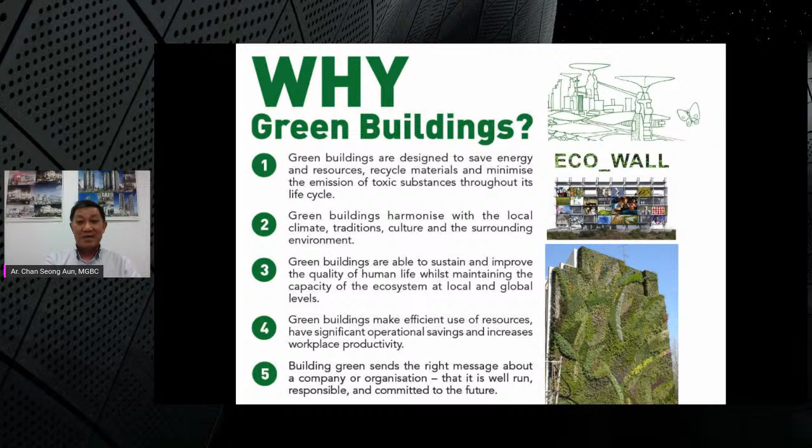Why green buildings? Of course, because they use less energy. They work with the environment they are in. They are more efficient, and they are the future of buildings. And because they are the future buildings, they are also future proof.

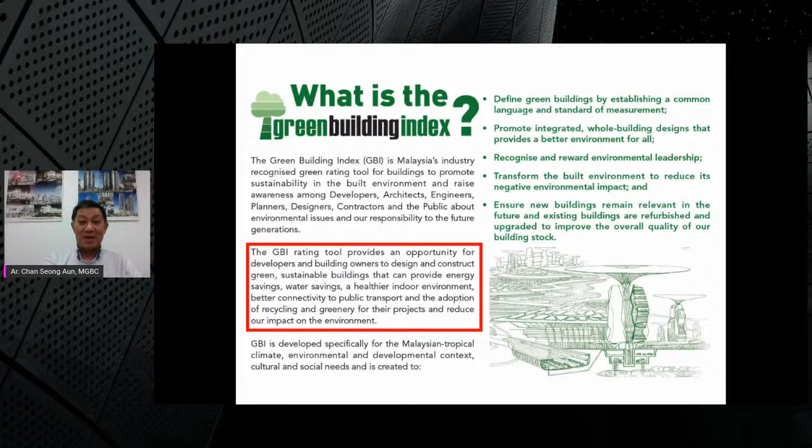The GBI rating tool was introduced in May 2009. Now it's close to 11 years already, and this tool has progressed. I think we have reached close to more than 2 million square feet of GBI rated buildings already.

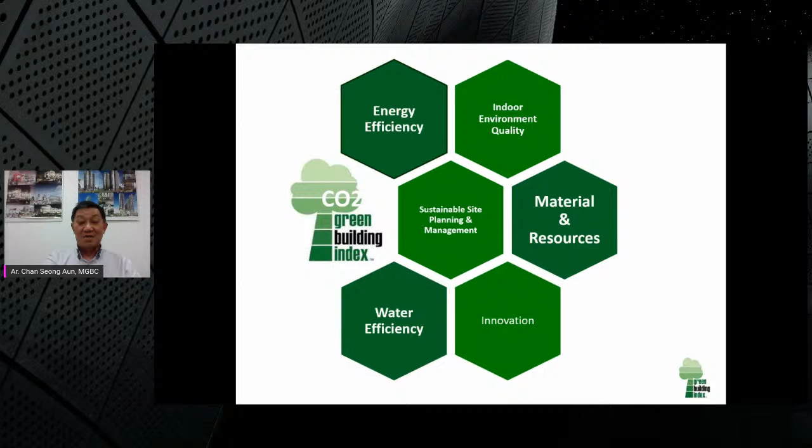This is the area where if you guys have new ideas, we have the ones that accommodate you. When we launched it, we immediately launched two new tools: one non-residential tool and one residential tool.

So we benchmarked the future from 2009 to 2019. On 21st of May 2009, this was the launch of the two tools straight away. Then these are some of the earliest certified buildings.

Then in 2010, one year after that, we immediately launched what is called the existing building rating tool. The reason is because I think this is the building that Architect Halim just talked to you about.

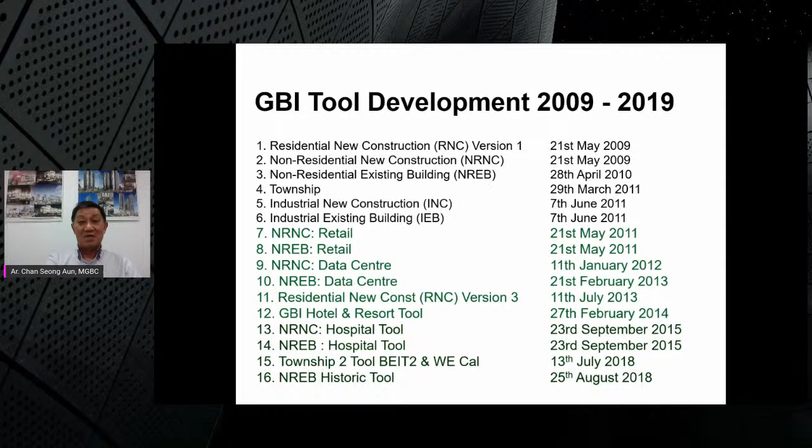In the last 11 years, we have continued to improve our tools, and we have launched close to 16 new tools. You can see in the last 10 years a lot of new tools coming in because there is a request and demand from the public for this type of new tool.

Okay, so now let's talk about upgrading old buildings with new technologies. What do we need? What has been happening in the last 10 years?

The first thing you will notice is new high efficiency glazing that has low shading coefficient but high VLT. What do we mean by that? A lot of the new type of glass coming into the market nowadays, later I'll show you the graph of it, actually lets in more light but blocks out most of the heat.

Then there's the new double glazing technology, they call it ATTOCH. For existing buildings, this is excellent because you don't touch the outside. You can put in a new layer of glass on the inside of the building, making it a double glazing and improving the heat resistance of the building.

Then we have green roofs. A lot of old buildings, as they begin to age, their roof waterproofing also starts to fail. So instead of just putting in a new layer of waterproofing, why not do some gardening on top of the roof? This is happening not only in Malaysia, but in countries like Singapore and a lot of advanced countries.

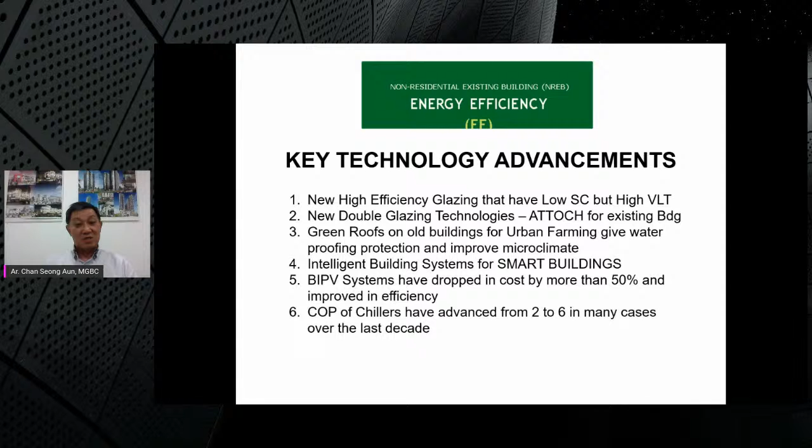And then of course there's the coefficient of performance of chillers. Many of them have advanced from a COP of around 2 to nearly 6 already, so it's almost a 3-time leap. So these are some of the technologies I'll be talking to you about.

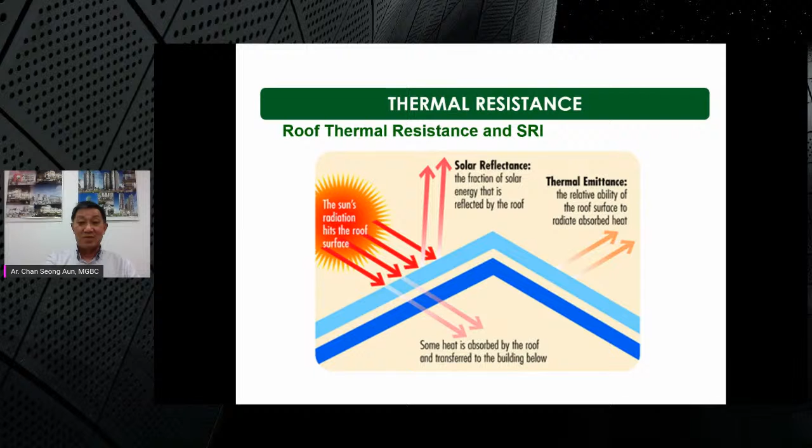Roof resistance, you need to improve the resistance of the roof, especially if it's a low-rise building. Most of the heat comes in from the roof.

This is an example of what I mean by improving it. This is an old mosque whereby JKR actually renovated the building, and they improved the concrete deck of the roof. You can see this - left side is 2015, right side is 2017. This is about a 2-year period for them to renovate, with a difference of 4 degrees centigrade.

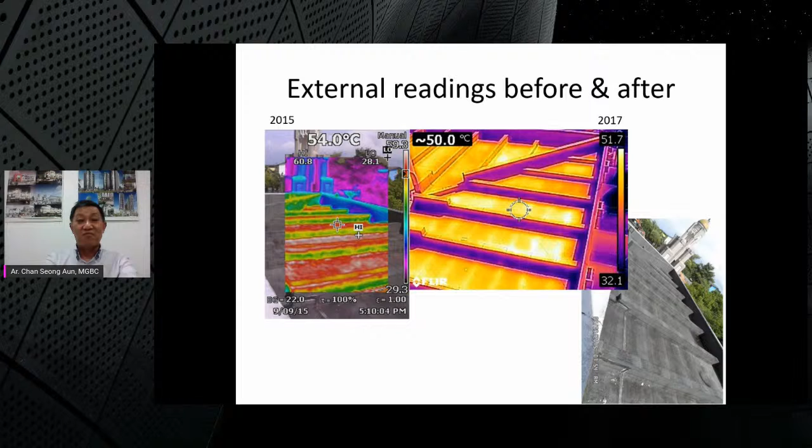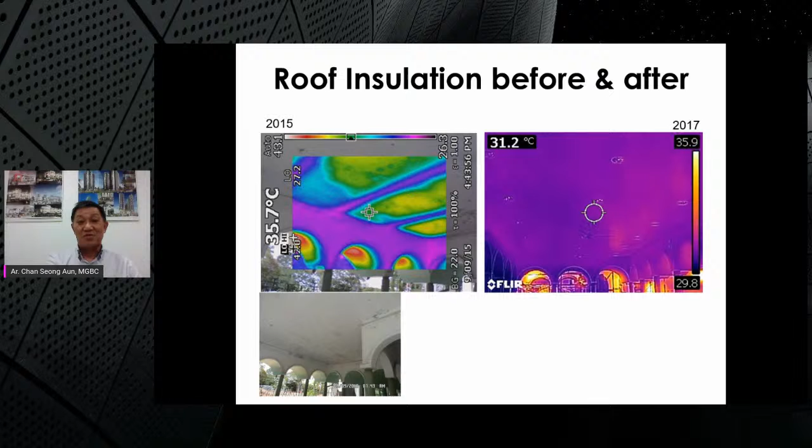This is underneath the roof. In 2015, it used to be 35 degrees centigrade. You can see the new one after renovation dropped down to 31 - a 4-degree difference in temperature of the roof. Imagine in the middle of the afternoon on a Friday, people go for prayer - that 4-degree difference, so you put a fan in, there's a better, even cooler environment.

Now, a lot of people are very skeptical about putting landscaping on top of their roof. This has been proven in Singapore. You can go to the NParks website - they have implemented this technology over the last 10 years in Singapore. You can go to Singapore, practically every roof is landscaped already. The website gives some technical information about how to improve your roof.

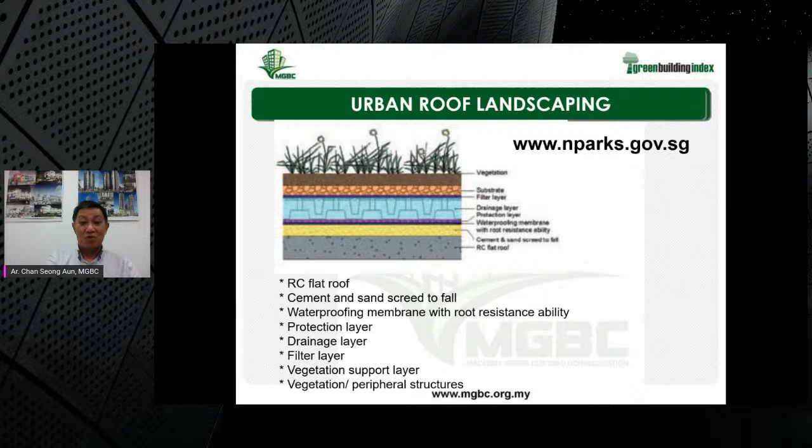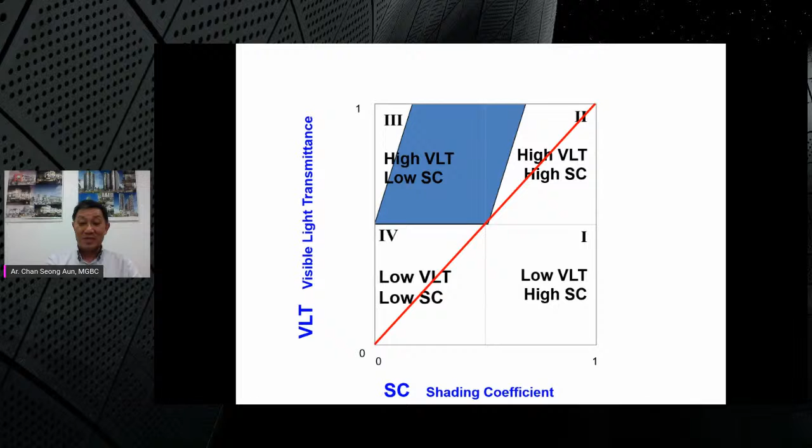The other one is the glass that has been coming in. You can see in the top left-hand corner, high VLT, low SC - this is what most glass technologies are trying to aim towards. Currently the situation is, for example, for tinted laminated glass, the right hand side is where all the glass is, but the new ones, you can see most of them are already in that blue dot on the top left corner.

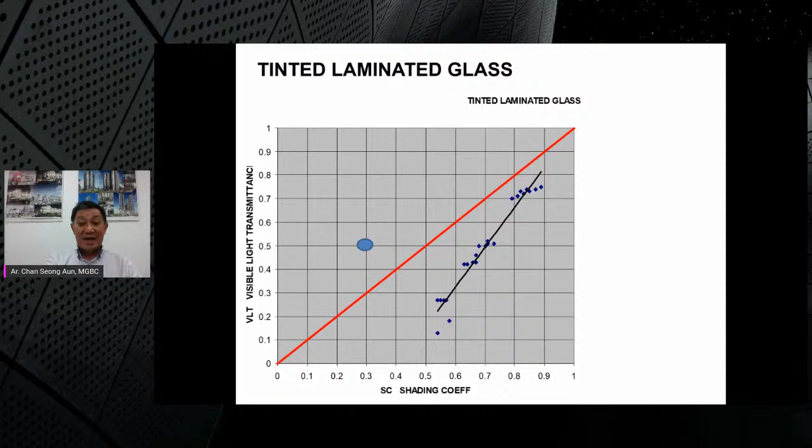And I expect the trend to move even further to the left and to the top. So for a high-rise building, this blocks out the heat from going into the building but allows the daylight to come in. The balance is very good because of this technology.

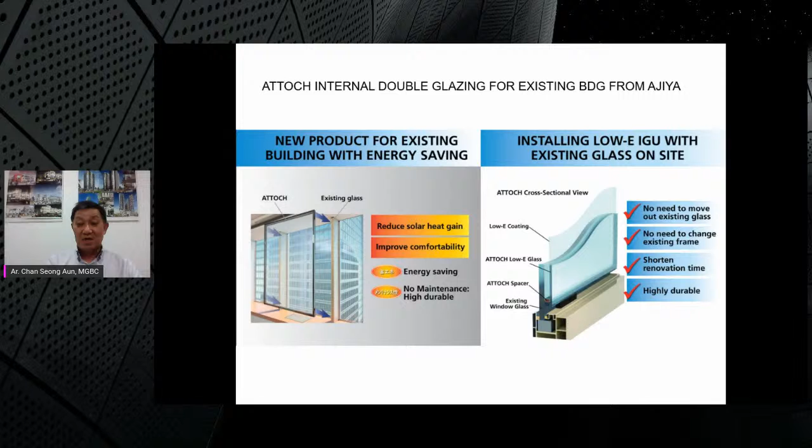Of course, if you're looking at existing buildings, this is the ATTOCH system available from Ajiya. They put the new glass on the inside of the building - this is where it behaves like a new building already, it all becomes new.

Energy use in buildings is typically around 64% for air conditioning in old buildings. If you improve your building and change your aircon systems, you can typically cut down that aircon load by more than 50%. And in the buildings we have been handling, whereby the old building is renovated into a new building, we have been able to achieve this type of targets.

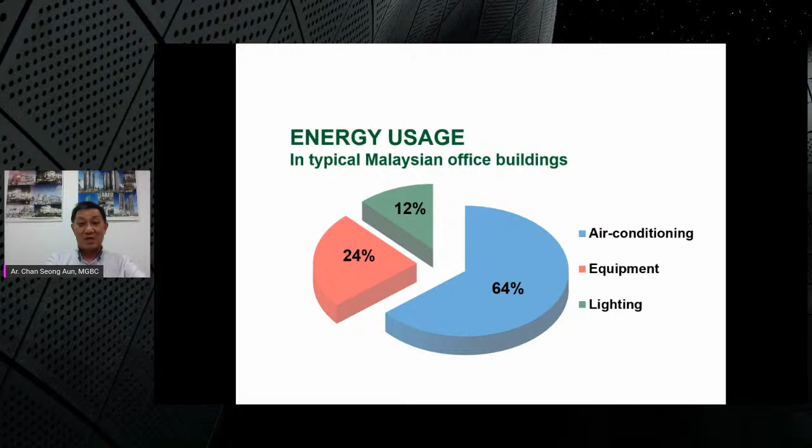Now, indoor environmental quality - what are the other things that you can see? LED lighting technology has improved energy efficiency by 50%. That means nowadays, if you have the old fluorescent tubes, they call it T5, take it out and put in the new LED lights - the energy use is 50% better, using half the energy that normal fluorescent uses, and it increases the operating hours by nearly 4 times.

The other is low VOC paints - these used to cost 20% more, but now cost less than the conventional non-low VOC paints. The other is light sensors and control systems, which are now more reliable and available for less, and the combined fan and motor efficiencies have been improving from 50 to 70% in our aircon indoor environment.

So these are the technologies that, if you are refurbishing your building, can give you that new advancement and improvement in making your building greener.

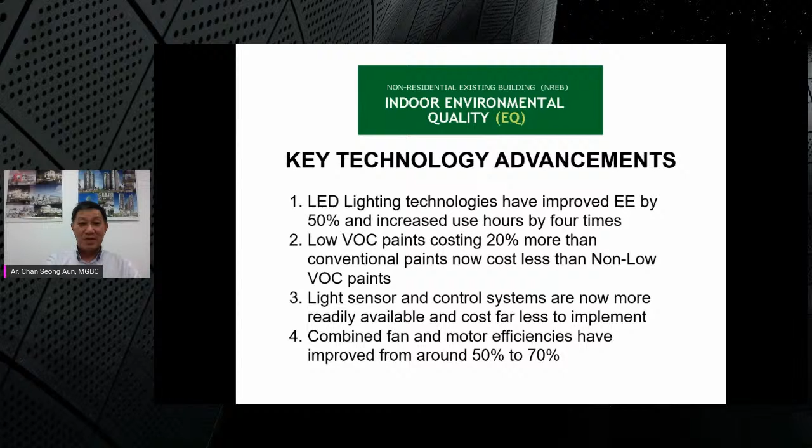Okay, what about sustainable management and site planning? Vertical landscaping systems and green roofs, I already talked about earlier, are now more readily available and accepted by many building owners.

Green and electrical vehicles are set to replace internal combustion engine vehicles. In the next 10 years, by 2030, if you are still driving an ICE vehicle, you are really out of date already.

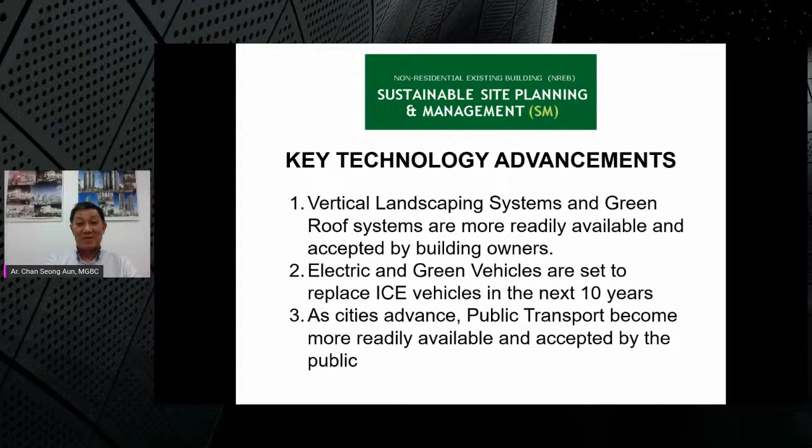As cities begin to advance, public transport becomes more readily available and accepted by the public, so TOD developments then become very important.

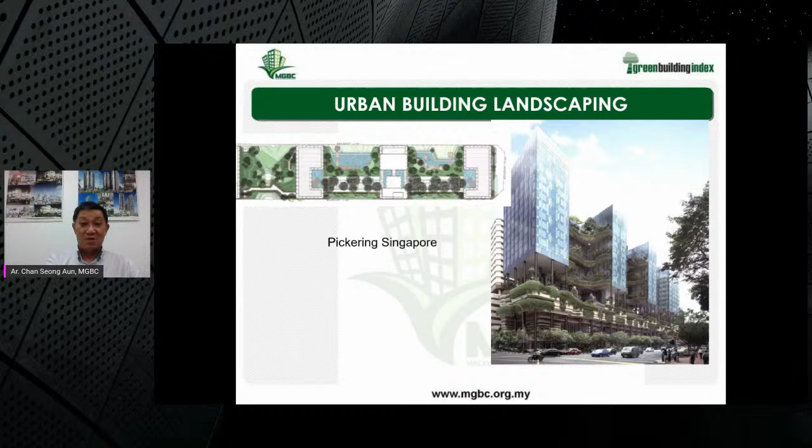Then materials and resources - this is where new construction technologies of off-site buildings have managed to reduce construction waste to less than 2%, approaching zero already. Advancement in the circular economy has also made available many building materials with very high recycled content. I think this is where the new advancements are.

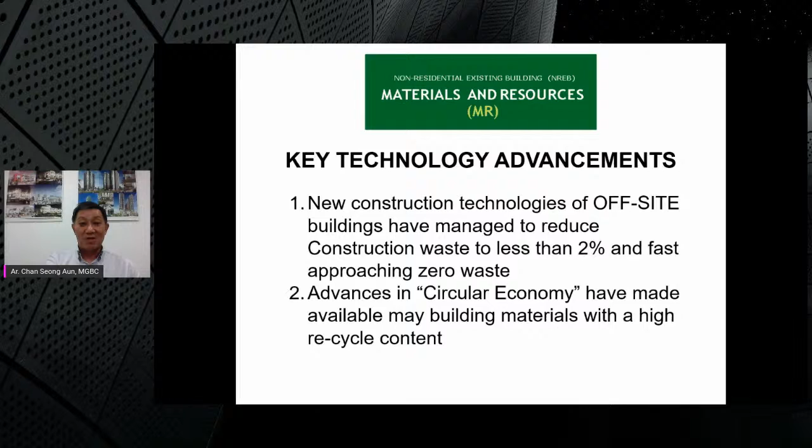If you start to build or order new type of materials, look out for ones which have a high recycled content. Zero waste construction will be for new, not existing buildings. You can see IBS and BIM integration.

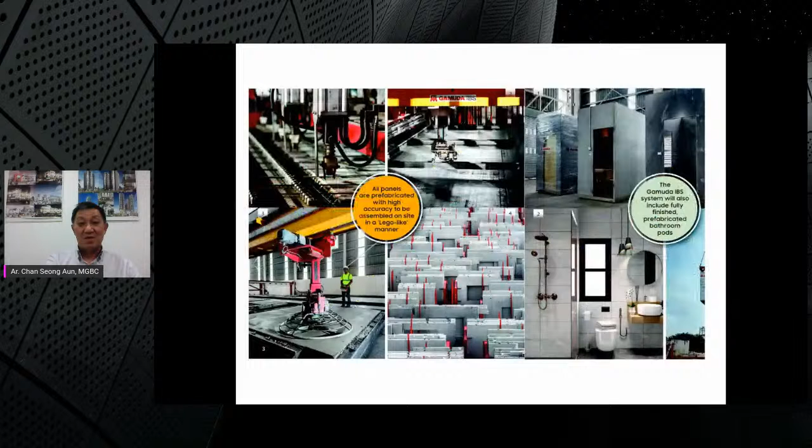I'm not advertising for Gamuda, but they are the ones who have brought in a new system of precast construction. This is the one that they have on their website - it's faster, more efficient, and more sustainable. I think Architect Halim also got one project doing this type of precast system, and I think he reaped the benefit of a greener building from that one.

Other key technology advances, for example in water efficiency, is rainwater harvesting from landscaping, which can reduce your water use for landscaping by more than 50%. That has been the case for the last 10 years we've been looking at green buildings.

And then if you change some of the water fixtures and fittings which are really out of date, you can typically reduce your water use just on the fittings alone by 50%.

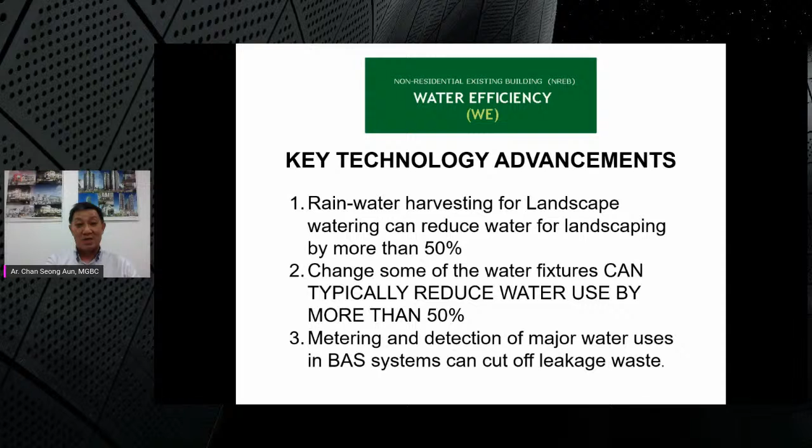Metering and detection of major water uses in the building automation systems can also cut off a lot of leakage and wastage in buildings which are getting older. So these are the key technologies you have in water efficiency.

In innovation, what are the things you can do? The new ones are regenerative lifts - they are already readily available. If your lift is already more than 20 years old, when you renovate your building, might as well put in a regenerative lift. Then there's vertical green walls and green gardens, which I've talked about earlier.

Then there's the solar hot water system. Nowadays the solar hot water systems are so efficient that even in a cloudy sky condition you can actually get hot water. The newer ones have an ROI of less than 2 years - the very good ones are less than 2 years.

Then we have new air filtration systems, which actually block out all the bacteria and viruses - good for our current COVID situation.

Electrochromic glazed facade is the most advanced type of system. This is a bit like glasses you wear - when the sun gets hot, the lens gets darker. So it blocks out more of the glaring light and also blocks out the heat more. These are some of the key technologies available.

Okay, now my time is almost up already. I have a building which I'm doing currently in KL City Center. This one is being renovated based on these key points.

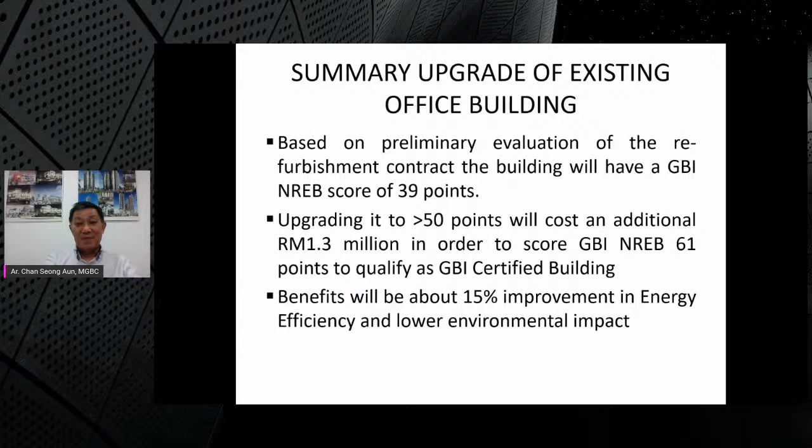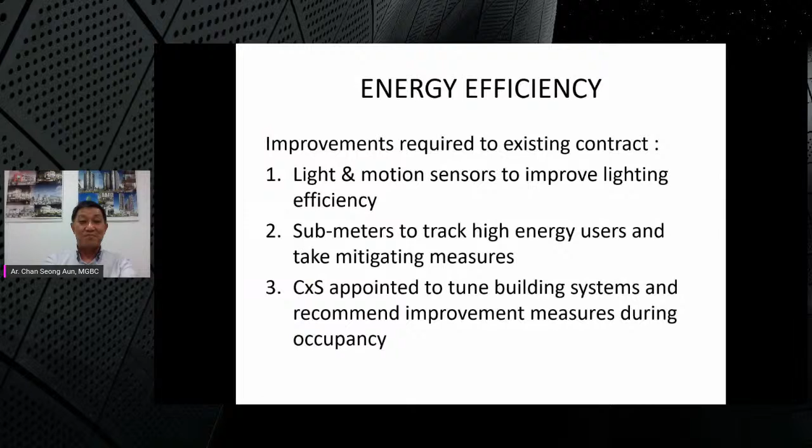I won't go through everything, but this is a quick look at an existing building - I don't want to name it. These are the key things we have been able to achieve, like for example light sensors, sub-meters, and the building's cooling system. We have improved the efficiency by 15% because we are using LED lights.

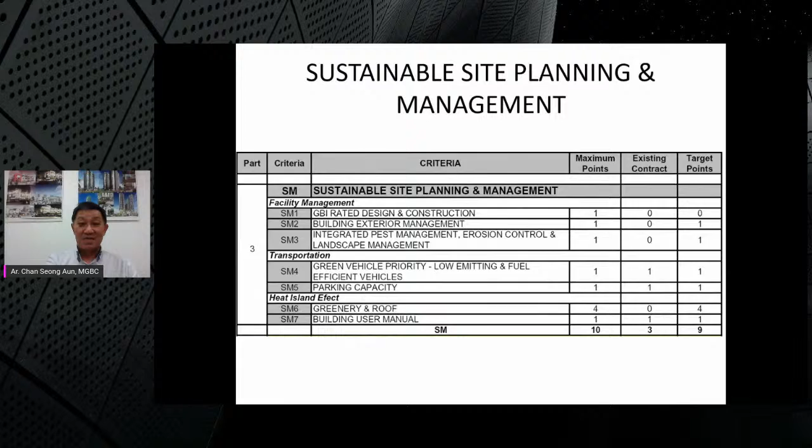We have non-polluting cleaning chemicals, we improve the roof reflectance, and landscape has been increased. The entire RC structure of the building is retained - we improve it because we don't waste the concrete that has taken so many years to build.

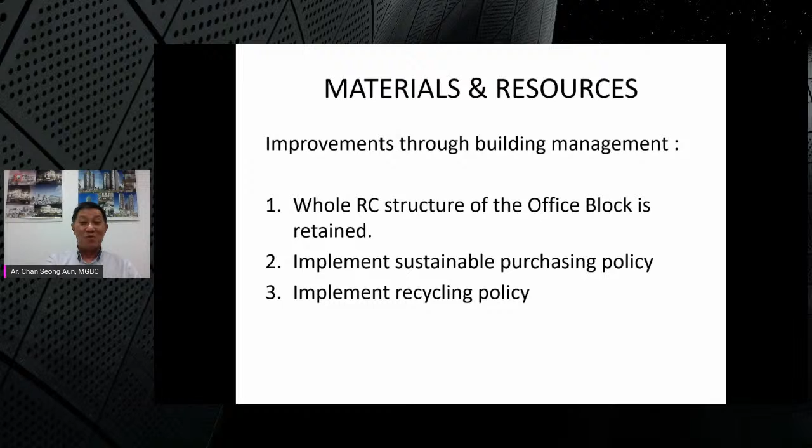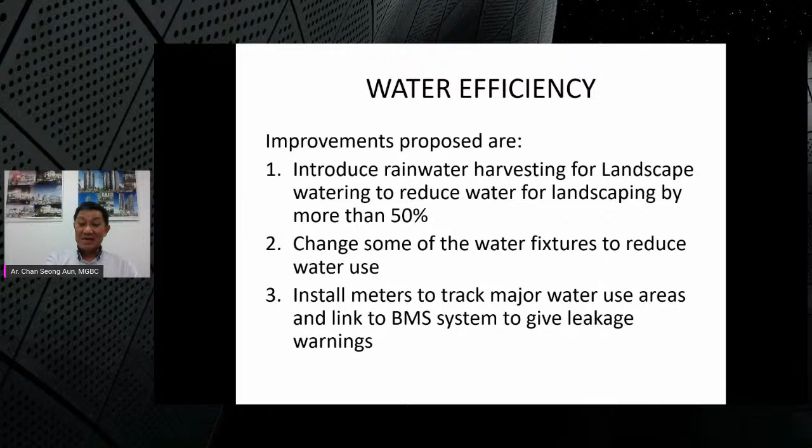We implemented a sustainable purchasing policy. We have a recycling policy. We introduced water harvesting, and then we changed some of the water fixtures. Meters installed to track any leakages.

Lastly, I would like to talk about net zero green buildings. This is the future of new green buildings, a target set by WGBC for us, and we advocate for it. We advocate for green cities. Number five, net zero building certifications - we are trying to move towards that. Malaysia will likely achieve 1 or 2 net zero buildings in the next 4 to 5 years.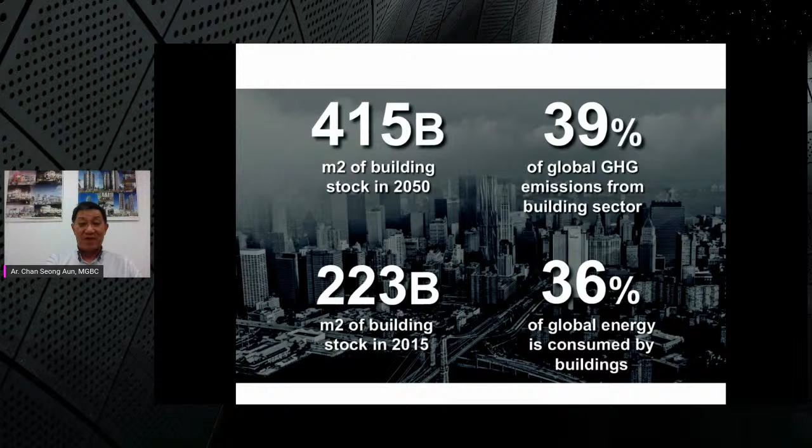Okay, I'm within the time span. Yeah, I think you're running very fast. There's a lot of numbers. Yeah, because numbers - sometimes people don't like to see the thing for too long. So we stay with it. If you have any questions you want to ask me later, you can still ask. Thank you, Architect, thank you, Halim.

Giving very practical steps for building owners to consider and maybe upgrade their existing building to be green. I think in the presentation they also outlined a standard format for establishing the baseline, and then how you could improve from that, and also the indicative cost implication. I think there's a very possible business side of it, because people thought doing green building is expensive, but it's not so. The ROI could come earlier, and you could reap the benefit for many years to come.

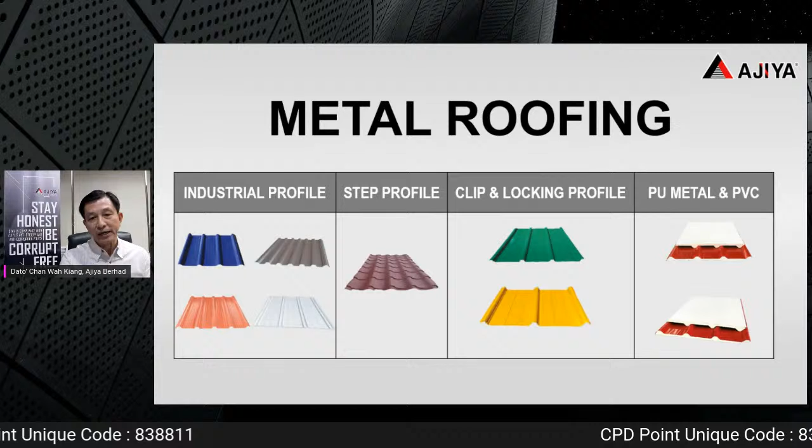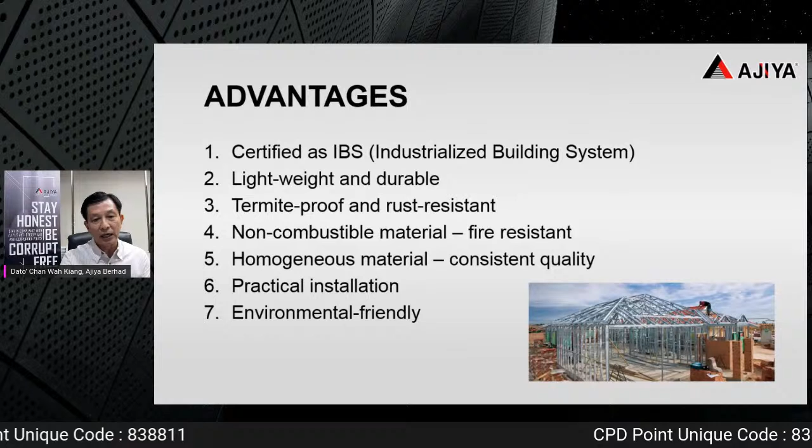As you may be familiar, Ajiya Group started with the roofing product - this is our series number 1, and most of our products are also IBS components. These are the series of roofing products covering industrial to residential. And we have the second series - the Ajiya truss system. These are metal truss, now substituting most of the timber usage on roof trusses. The advantages of being IBS are: lightweight, durable, termite and rust resistant, non-combustible material, environmentally friendly, easy for installation, and homogeneous material that is consistent in quality.

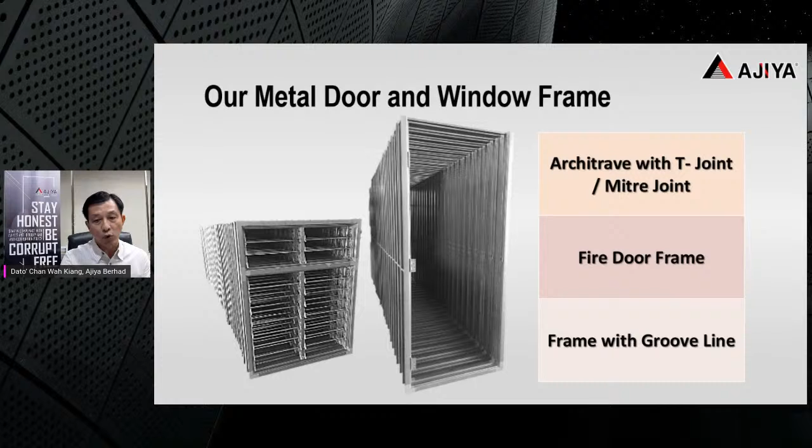Likewise, we also have this series of metal door and window frames, which is substituting most of the timber door window frames in the market now. They could have the T-joint, miter joint with the architrave, and could also be fire rated.

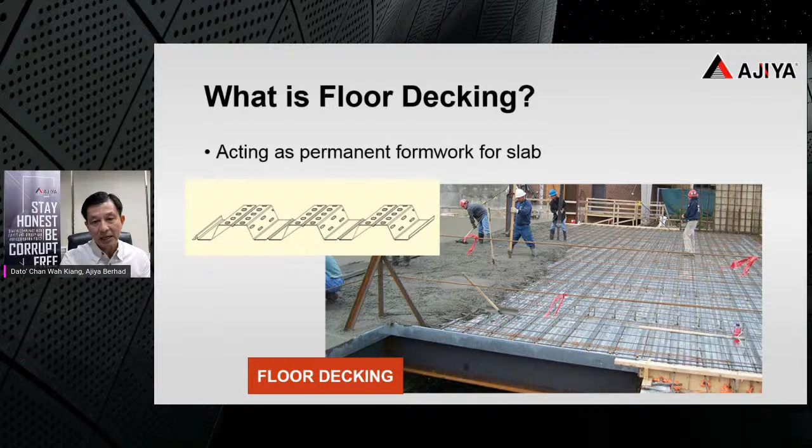And we have another series, composite floor decking, which could be used as a permanent formwork for the slab. This is also a fast, rapid construction method, and we have been supplying it to projects like SUKE, DUKE, and DASH Highway.

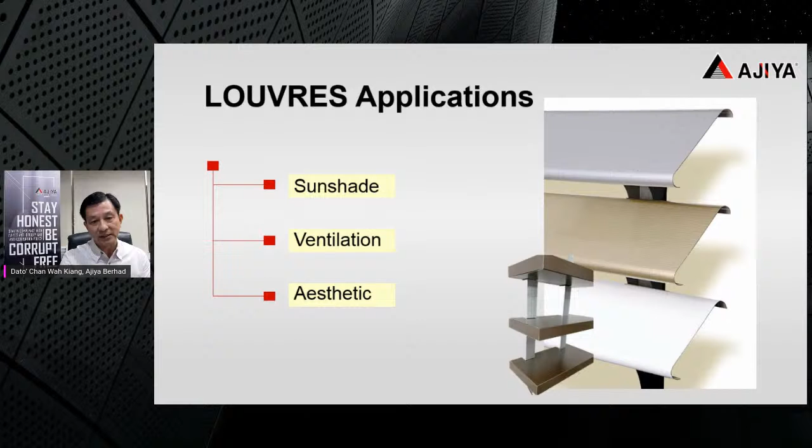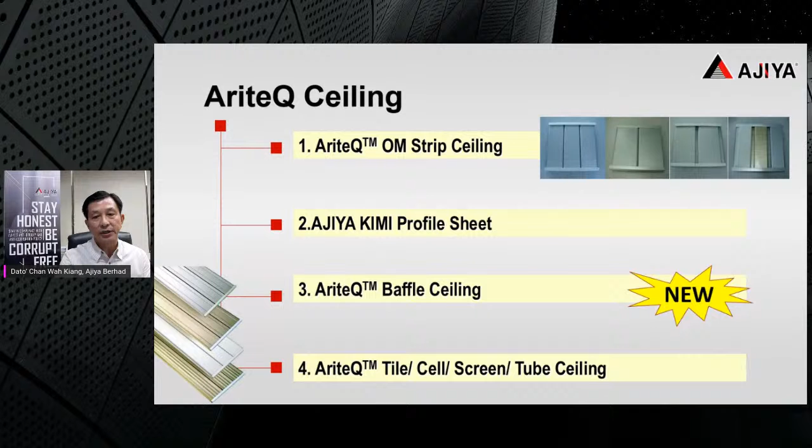Number 8 series is our Ajiya lightweight steel framing, a wet solid wall system, which is also an IBS. It could be used as a dry wall, but being adaptive to the tropical climate where Malaysia is situated, a solid wet wall will be suitable. We are proud to say that Ajiya has patented this. It is made in Malaysia, and if used as a dry wall, it complies with Australian standard, endorsed by CIDB, and it is made from recyclable material, the steel material.

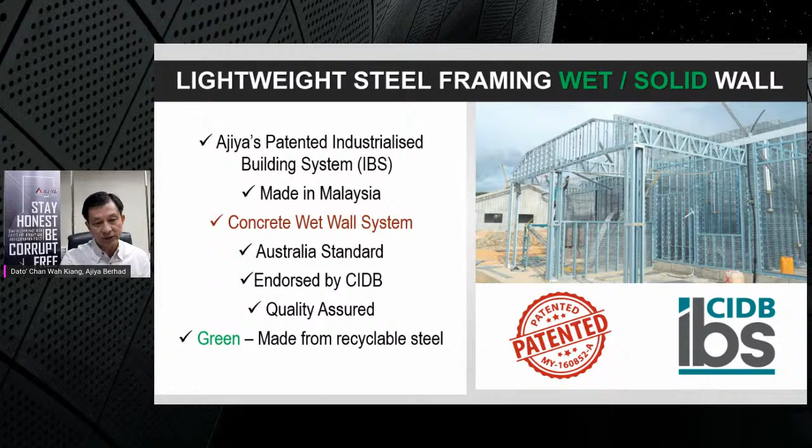Towards being a one-stop housing solution provider, this is why Ajiya, as of today, after 30 years of producing all kinds of timber substitute, metal-based building material products, is now able to combine all of this together to become a total housing solution. This is how we put it all up. If you put up all these 8 series together, you could virtually build a house.

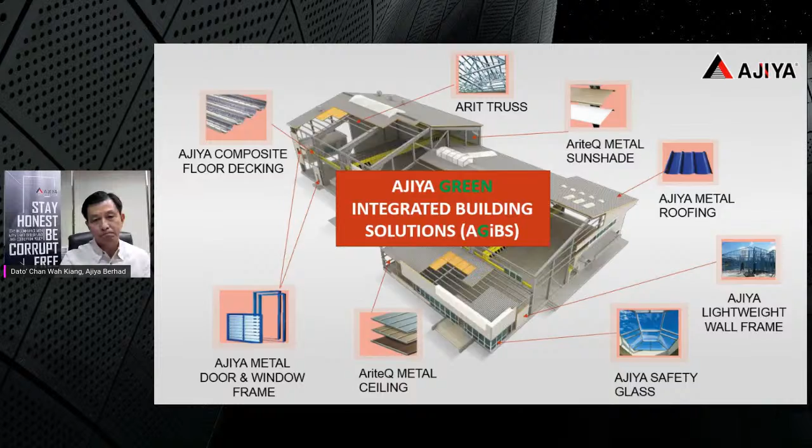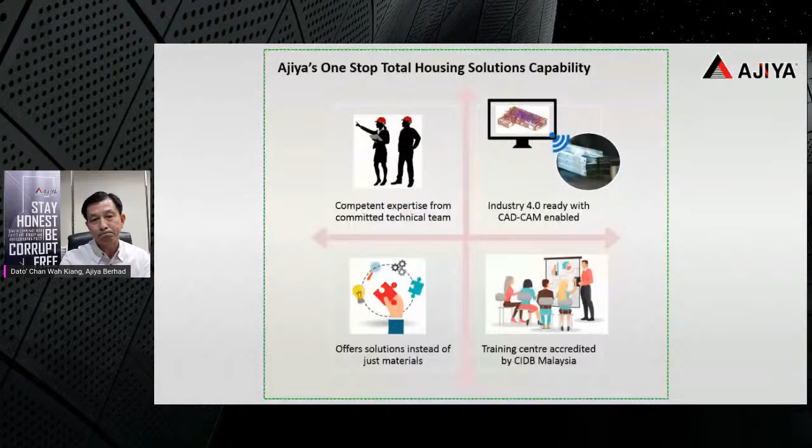So with our AGiBS, it is fast and easy installation. It has minimal debris at the site because it's all prefabricated at the factory floor. Dimensions are all predetermined, even hole punching is pre-produced in the factory environment. We use sustainable lightweight steel, it is manpower efficient, and the finishing is seamless. It has flexibility in design, for a single unit or house, or multiple units or houses.

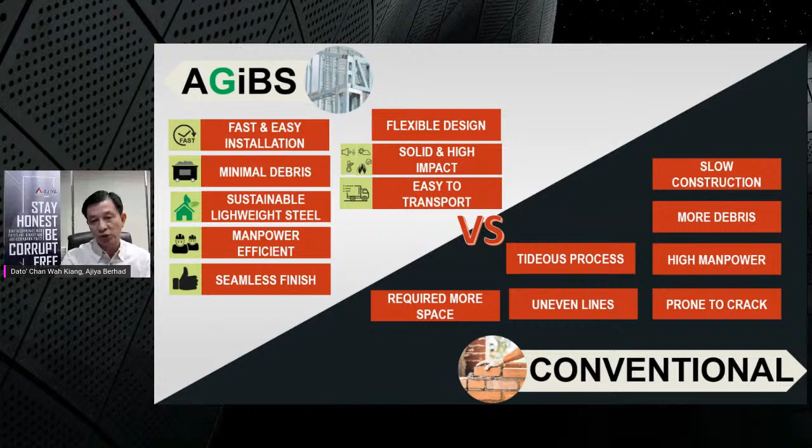Because it is infill and in situ, the wall is solid and high impact. Because it is in component form, it's easy to transport, even a single unit of a house or a hut on top of a hill, you could easily bring it up. This is versus a traditional method which requires more space for construction, a tedious process, a slower construction schedule, and generates a lot of debris because of formwork usage. It also needs more manpower and is prone to cracking.

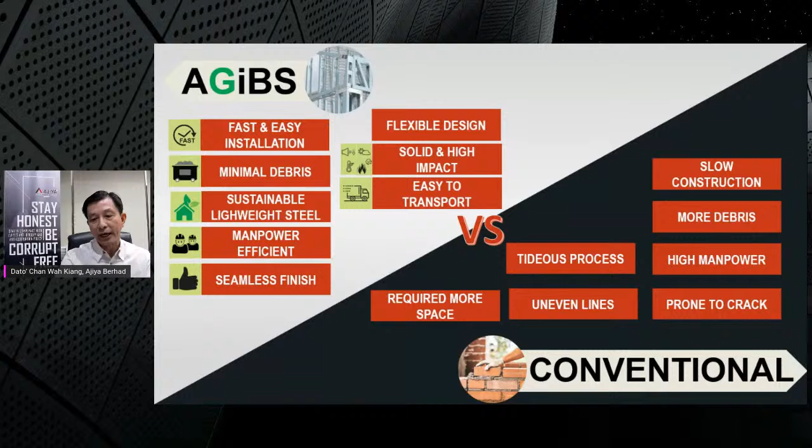This is the AGiBS installation method statement produced by Ajiya. It is very comprehensive and gives very clear instructions. Before we sell any AGiBS component to a customer, we only do so provided they have already gone through a training session at our training center, which is accredited by CIDB.

So if, two weeks before, we have a green card ready, we could register with them. Upon completing our workshop, they would be assessed by the assessor, and you could get the CPD points and also have your skill level added into your green card.

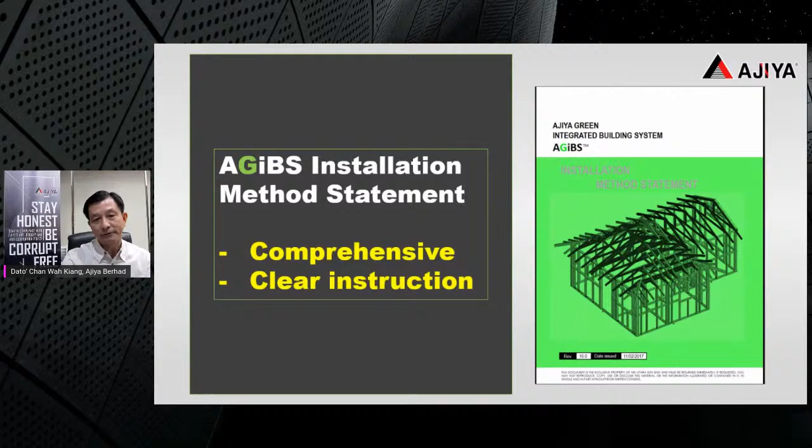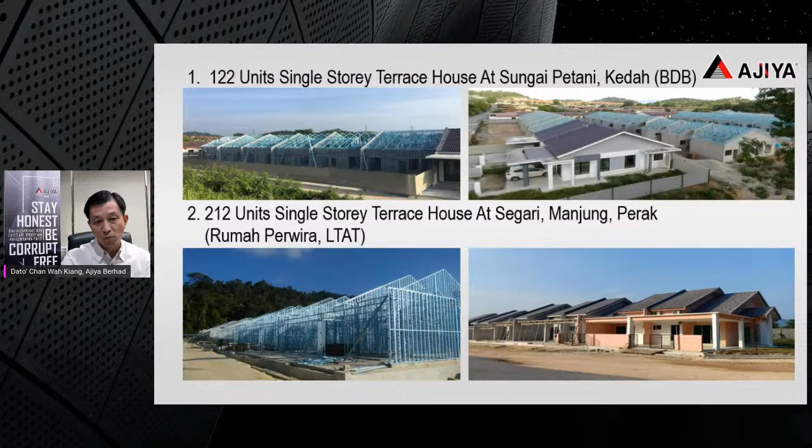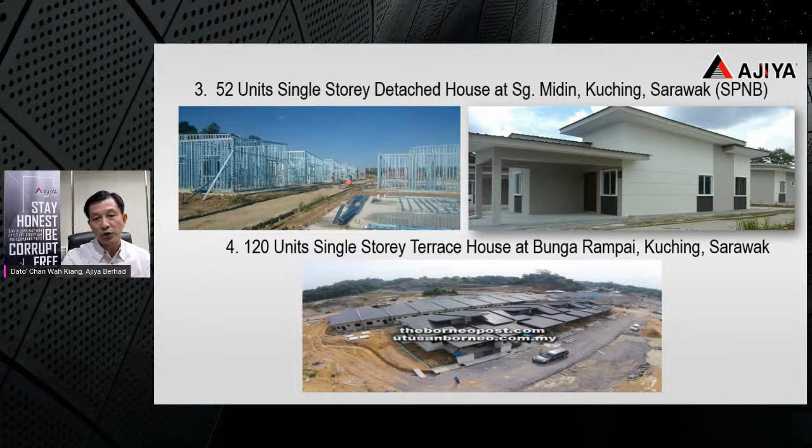And these are the project references that we could share with you. We have completed 122 units of BDB housing, 212 units of Rumah Perwira by LTAT, 52 units in Kuching, Sarawak, that means over the sea, and it is also practical. Likewise, 120 units in Bunga Rampai, Kuching, Sarawak, 208 units of PPR in Petrajaya, Sarawak, single-story terrace houses at Chiku, Gua Musang, Kelantan.

And today, we are proud to say we have supplied close to 300 units of individual Rumah PPRT projects, and we could possibly do so.

It is by providing training to the G1 contractors, moving from non-IBS adaptation to IBS adaptation using our system. Today, we're proud to say there are hundreds of them. The G1 contractors are already well versed with this kind of IBS system, and they could continue to build more Rumah Rakyat Termiskin scattered here and there, single units or two units at a time.

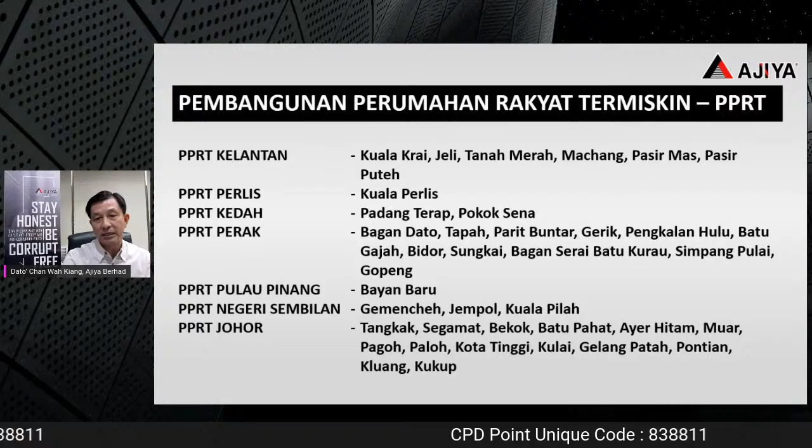And this is the progress of the PPRT projects, where we provide site training. You could look at that - there could be areas not easy to access by heavy machineries, and ours being lightweight, it is easily moved around, and need not have a heavy machinery to do the erection and also the construction.

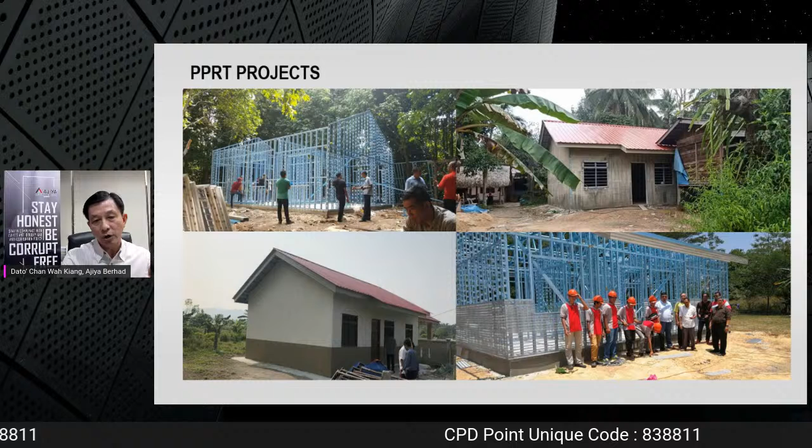So a solid house could be built within 3 to 4 weeks at an isolated area. And this is another PPRT project where the house owner is happy after 28 days.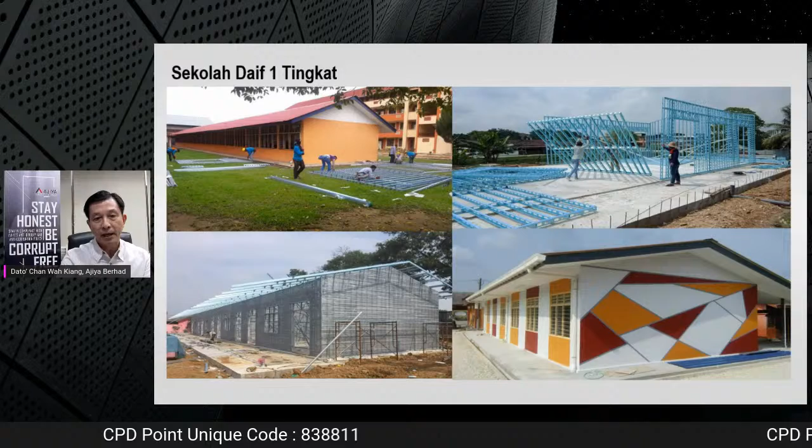And this is a double-story house, double-story school building, where the superstructure could be completed within 10 weeks, despite during the monsoon season.

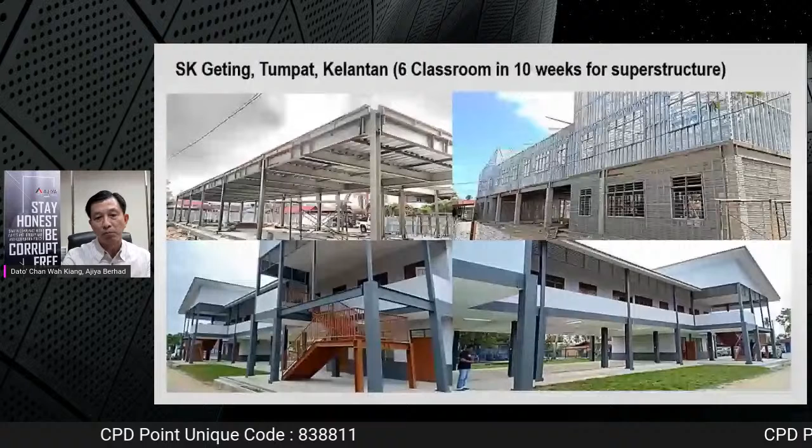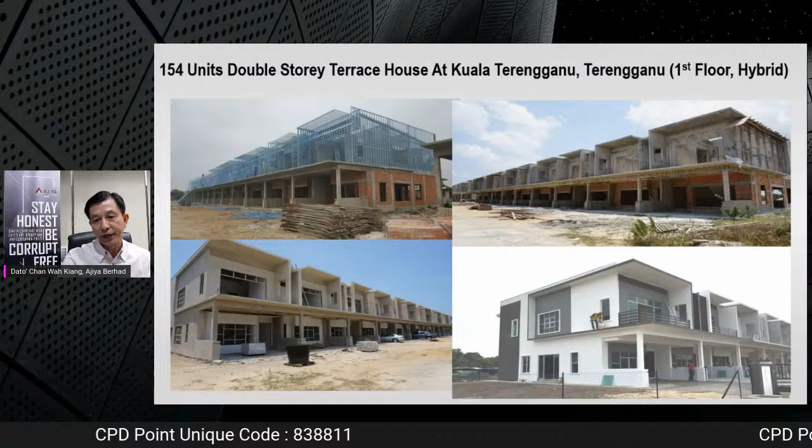And we could also use it as a hybrid, where the developer or contractor finds that after the groundwork, the ground floor work is too slow. So instead of using formwork again, they use our system, adapt it as the second floor, and they could complete the projects in time.

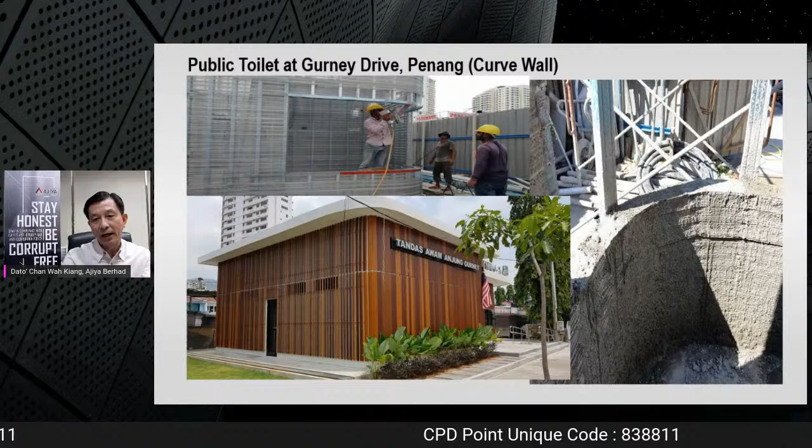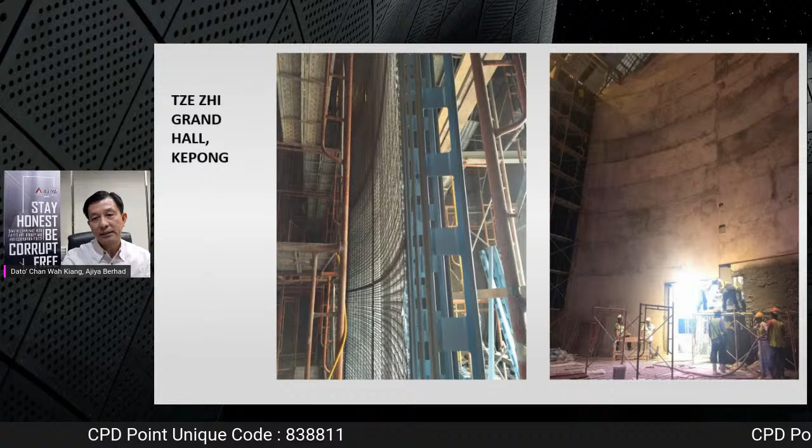When you come to the curved wall, like this public toilet in Gurney Drive, Penang, ours being able to be segmented, so you could make a curved wall using our ARCHIDEX system. Likewise, for a grand hall, which is curved as well, if you use our system, you could segmentize it again and need not have formwork. So this is a formwork-free kind of curved wall.

Likewise, a staircase, you could also use our system.

And many questions will be asked: if this kind of solid wall, could it be renovated? Yes, it is just like any traditional wall of cement and mortar where you can actually cut, hack, and do the extension, provided you follow the reference of good practices, where if you would like to cut a big void, then you could do a proper lintel before you cut a big void.

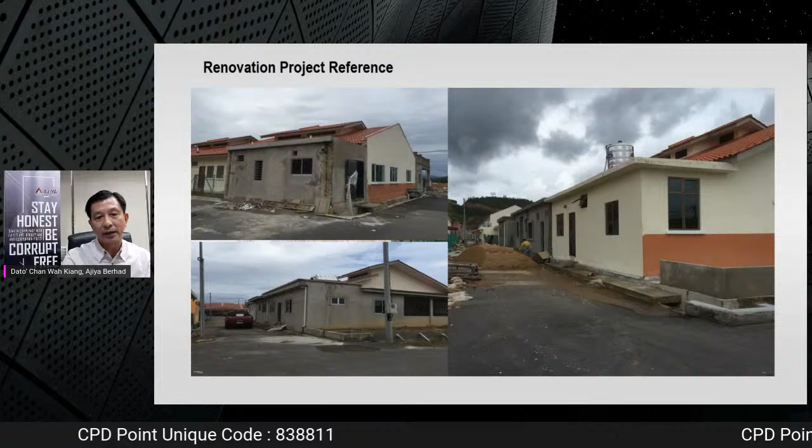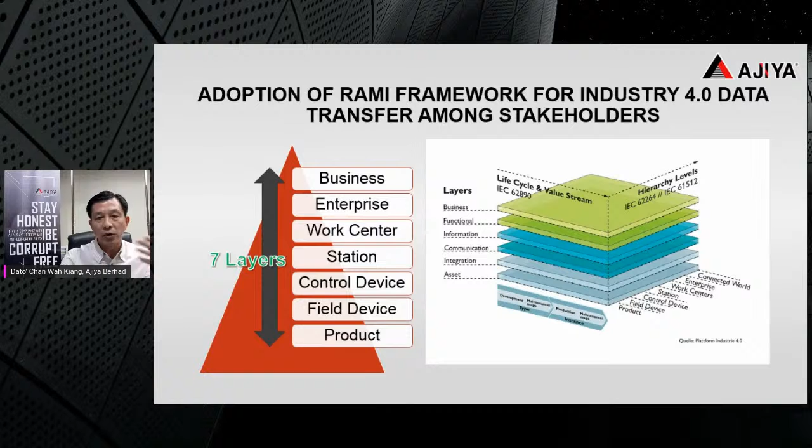For that, we are adopting RAMI as our framework for data transferring. These are the 7 layers of integration we are talking about - from the product, field device, control device, stations, work center, to enterprise business. That means horizontally it is automation, and vertically it is linked to the business, which is the vertical integration, and it must also be interoperable, and the data must become an asset. Then you assetize it, and your data becomes something meaningful that could be shared within the stakeholders, shared within the whole ecosystem, where your suppliers and your customers will know what is going on.

And at Ajiya, we are also aligned with the UN's SDG 17, partnership for the goals. This is where we are working with Malaysian Green Building Council and other stakeholders in the industry, and likewise also adopting the usage of solar on our rooftop. As of today, we have installed 3.3 megawatts of photovoltaic solar panels over the factories nationwide that we have.

And this is how the Industry 4.0 preparation at Ajiya works. First, we are talking about vertical integration besides the horizontal integration. Being a manufacturer, how could we link up with our supplier, with our customer, and likewise, how are we also going to talk about the delivery? So we are connecting all stakeholders, and all these are using the digital asset administration shell, the AAS.

So this is the process where we are using BIM, building information modeling. We have the bill of materials and data transfer to the machines for the production, likewise CAD drawing for assembly and CAD drawings for the maintenance.

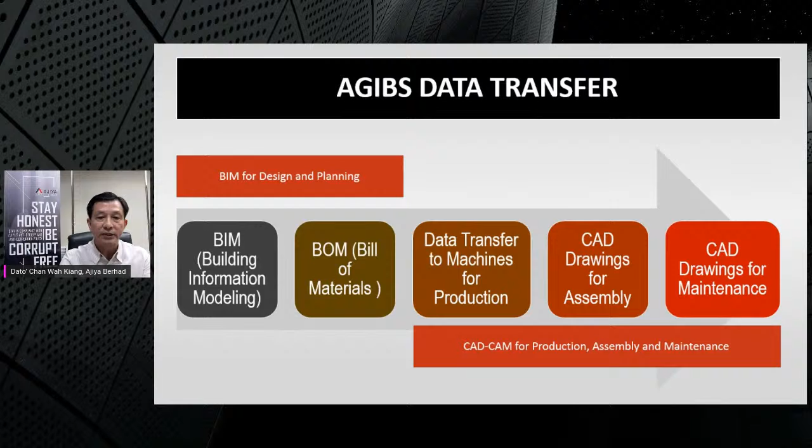Okay, so this is a video that we are showing you - this is a Rumah Mesra Rakyat that we are using as such.

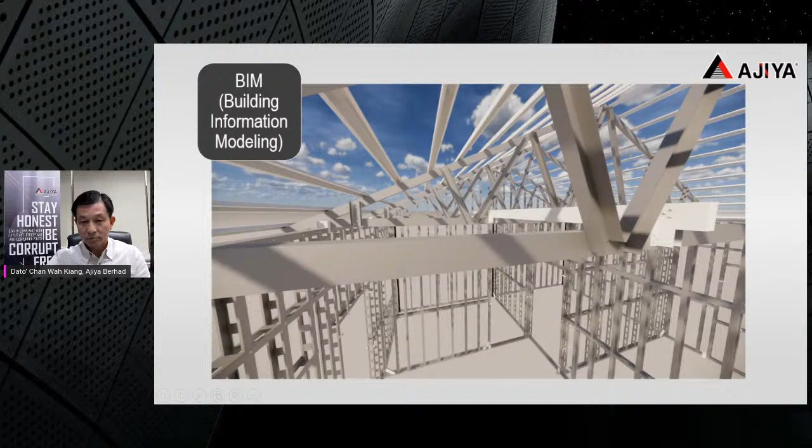So thanks, and also beside that, we also have the ARCHIDEX. We also have a homeowners maintenance manual, so this is to ensure the current owner could pass on this maintenance manual to the new buyer.